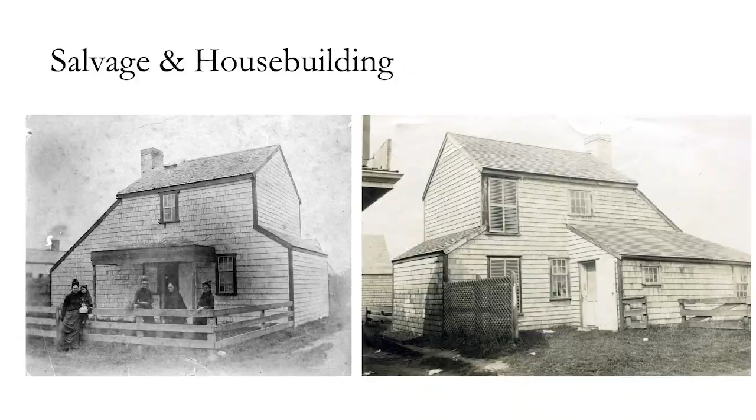You go out to Sconset - that's the next picture. You see Sans Souci, a house here. Has anybody seen this house out in Sconset on Shell Street, Center Street? I give the tour, but it's built out of pieces of shipwreck. Bricks that were from the British ship Queen were scavenged by the people living here to build the chimney.

And in addition to salvaging these structures, we've been moving them for about 270-plus years, something that if you go to any HDC meeting, you're going to hear me say on a weekly basis.

Anecdotally, I was provided some family history as a Nantucket native of multiple generations who married another Nantucket native. My grandmother-in-law told me that in 1959, part of their house was actually deconstructed completely, and part of it was used to build a new structure on West York Street, as well as some of the verge board from that Victorian structure being put on another structure on North Water Street. Again, this is part of what we've been doing with revitalizing our structures.

I went through the paper and looked at a couple examples of historic salvage. One was in 1947, when Albert Egan Sr. removed the Hiltz property adjacent to the Sconset Inn. The structure was taken down with care in order to salvage as much of the material as possible for the new cottages - the Moby Dick Inn cottages out by the summer house cottages.

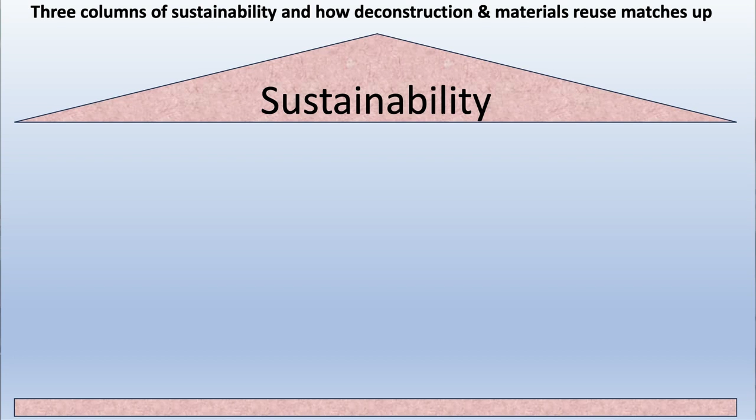I'm going to look at how we can do that in relation to building materials, deconstruction, and materials reuse, because this all feeds into maintaining our historic fabric. I know I'm borrowing from some previous themes and future themes discussed here today. But the historic fabric, as Holly explained to me, is what the character of our homes are. We're talking about our homes as far as this effort is concerned, and some other ancillary type buildings and municipal buildings as well, potentially, which would be wonderful.

We already talked about the environmental part of sustainability. Here's how you can include it: by looking at carbon savings, keeping embodied carbon within the property and within materials, reducing transportation emissions so we don't have to bring so many things here or move deconstructed or demolished materials off island. Reduce landfill emissions, because once we put things into landfill, things decompose, carbon gets broken down, methane is released, and that is net negative and bad for our environment and atmosphere, triggering more of the climate problems we're already starting to see.

We reduce our disposal volume, which is clearly a good thing as we look forward to where we have to close our town dump, and how construction and demolition building works and operates. And it reduces overall demolition waste.

The next leg is the equity leg. I'm going to hit the same theme twice between this and the next one, but it is effectively cheaper materials for people to use to build homes. When we already have an overly stretched housing market to some degree, if you can get lucky and get yourself a plot of land and try to build something on it with cheaper materials, all the better for the person building the home.

This is where I bring back in retaining the historic fabric. Mary already said it - it's materials that might have come from one building and be in another, but it stays on island and keeps our character in place.

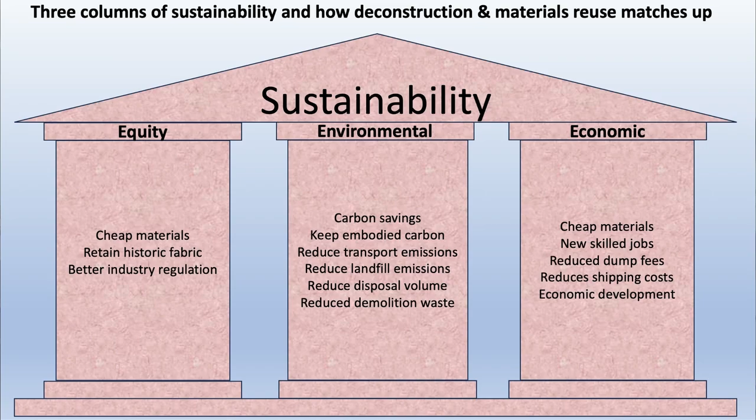Before we get onto that, I'm going to look at different options of how this might all work. The main one, and the best option in some respects, and one of my favorites, is to move the whole house - move it to a different site, and you get to maximize your carbon savings and move along. This is the best option in some ways.

There's already a town bylaw that covers this - the demolition delay bylaw. You get 60 days to try and find somebody to take the house and move it off-site before a building is demolished. It would be lovely to see that term of time increased.

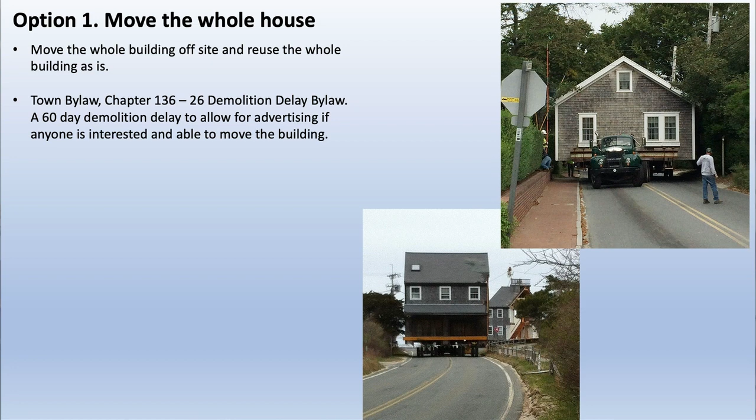There's an existing program that Nantucket Housing Trust and Annie Kutzba and her organization run, where they have people waiting in the wings to take these homes if there's a suitable matchup between a person who's ready to take a home, has a site they can move it to, and can get a company in place to move that building. This is all done through HDC approvals, and I encourage people to sign up for it if they can.

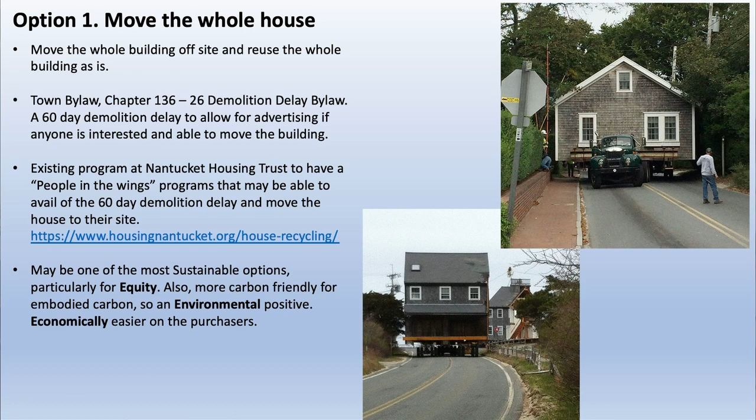I'm looking into it, but we also have to look at how this fits in with one of our existing activities of moving homes. As Holly says, we've been doing it for centuries here in Nantucket, and it hits all of the sustainability goals. It fulfills equity because it makes a cheaper building available for somebody to reuse. It obviously has the carbon savings, making it an environmentally friendly way of doing it, and because it's cheaper.

Sound died. Oh, we're back. Thank you. He's right there. Thank you very kindly.

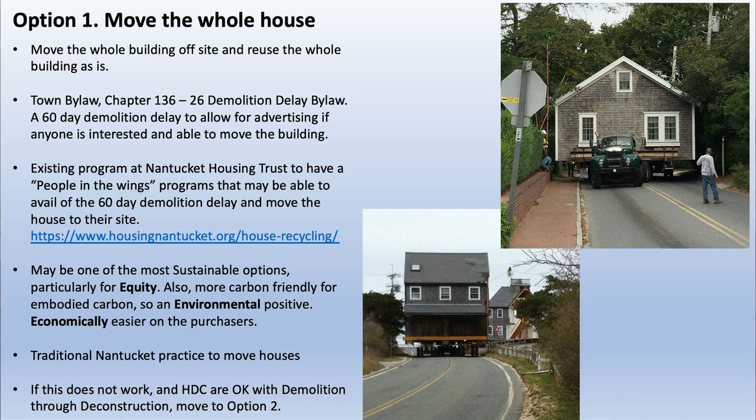So fulfilling the economic part of it. And as has been said many times before, and will be said many times here again today, this is a Nantucket tradition. It is part of our local ethos. And if it doesn't work, the HDC are okay with it, then sadly we have to go down the demolition route, which, as we've already heard from Mary, we have to know when to say thank you and goodbye to the house, to quote Marie Kondo.

So when we look at deconstruction, we have two key options as I see it at the moment. This is looking at it in a forward-looking way. How could we do this, and trying to see what policies we could put in place, what infrastructure we could put in place.

The way I see this working is that we could have a town facility, and this has been widely discussed and people are quite interested in this idea. Or we could do it separately like other communities and have a bylaw in place. So what I'd like to do now is go through how we might have a town facility, how that might function, how it could work, and then how a bylaw might work by comparison. They're two very different tracks.

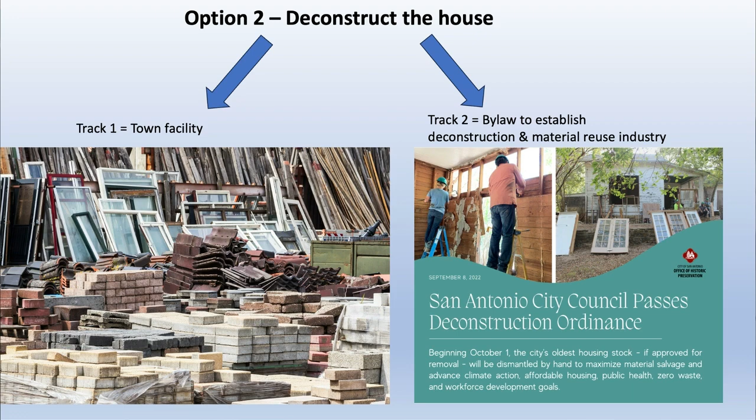So to explore the town facility first, we're going to have to find a place for deconstruction materials to go. There was a great report done recently, I think about a year ago, maybe a year and a half ago. I'm going to misquote it now, please somebody correct me, EBC. And they developed this wonderful plan for possible locations where such a building might go.

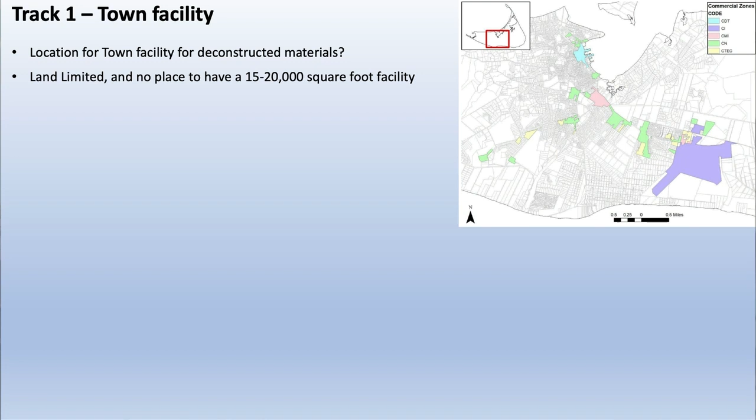But when we look at it, the building would probably, and in the report they have similar numbers, be something in the region of about 15 to 20,000 square feet. It'd be a big facility. But we have to understand what that means, just try and visualize it. I went around and had a look at a few things, cruised the town website and looked for similar sized buildings so people get an actual idea of what 15 to 20,000 square feet would be.

When you go to the dump on a Saturday or Sunday morning and go up to the recycling facility, and there's all those doors where you put down your plastic, tin and cardboard, that whole building itself goes back quite a distance and is maybe 35, 40 yards from east to west. That by itself is a 20,000 square foot building, big enough to take large-scale machinery in and out. But the footprint is 20,000 square feet.

The Dreamland, right here in the downtown area, just the footprint on the ground, not upstairs or anything, that's about a 10,000 square foot building. Right here, our Whaling Museum, the footprint of this building is about 15,000 square feet. So we'd need something at least the size of this building potentially.

But if you want to get seriously ambitious and have such a massive centre that we can take the extreme volume of property we have on this island over time, just look at Stop and Shop, the big one Mid-Island, about 38,000 square feet. So maybe somewhere between the size of the Dreamland and Stop and Shop is what we'd need for a facility to store and process deconstructed materials.

But it's not just that. You also have to have the access roads, the parking, and a loading and unloading area. You have to bring all of those into mind. You also have to look at the materials you're dealing with. We're going to have windows with lead paint on them and door frames and that kind of thing.

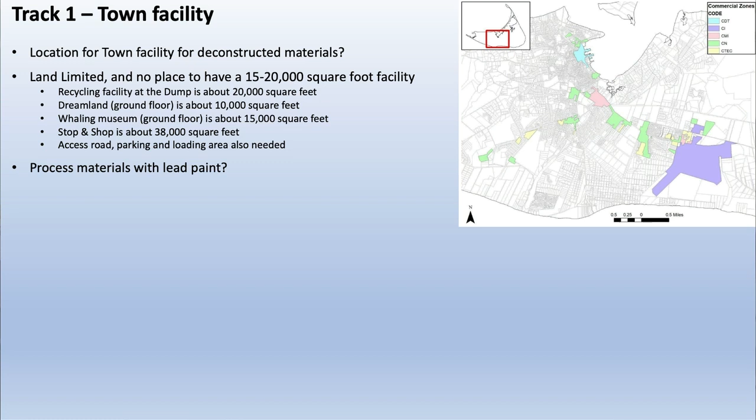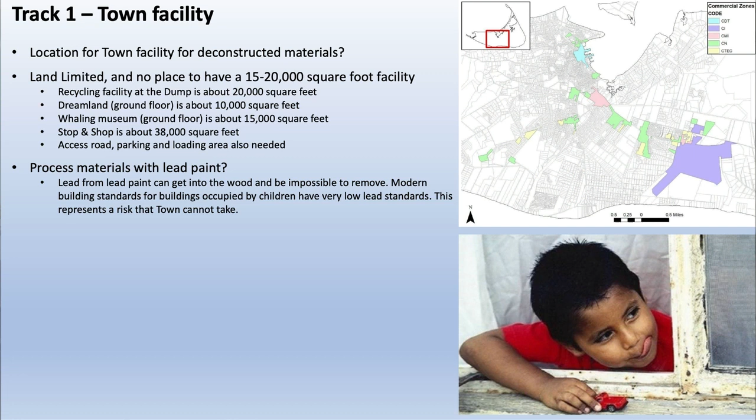And don't forget, kids think lead paint tastes sweet. It's a known hazard that you just have to be careful of. So we have to remove those hazards from any materials we want to reuse. And then there's other materials like asbestos that we have to look at, how do we deal with those in a safe and effective way so people don't end up with mesothelioma.

So then the next question is, who would undertake the deconstruction? Would it be town staff, contractors and builders, or something else? If it were contractors and builders to help get an industry going, one idea is to have tax incentives. I'll talk about more of that in a second.

And who will staff the facility? Would it be town employees? Would it be private contractors, or how would that work?

And what would the annual running costs be? Do you have to sell the items in order to fund and recoup the money that goes into it? What would their salaries be, and how would you fund that through sales? Would they be town staff on pension funds, or would they be private employees? There's a lot of ifs, ands, and buts, and some unknowns, but just stuff to start thinking about.

If we did have such a town facility, how would it operate, and who would be best to run it? And then some materials won't go right away, and they might end up ultimately not being of use and never being taken by anyone. Then the best point would be to take it to the construction demolition building at the dump, so you still have to dump it anyway. You're not going to be able to reuse everything that's brought to such a facility.

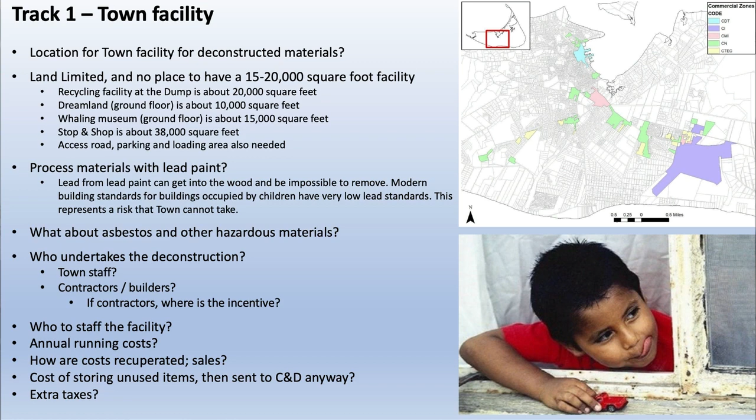And would extra taxes have to fund it? There's a big question in that one alone.

Then there's the concept too, when I was chatting about bylaws, and this is something that's been done in other jurisdictions and municipalities, not necessarily in Massachusetts, but we've got examples from Texas that we've been looking at closely. This would have to involve the creation and writing of a new bylaw for the town, and that alone takes time — it could take years to get right.

It would probably also have to have a set of guidelines in order to understand what materials you reuse, how they're reused, how they're processed, how they're handled, and what their value might be.

But the best thing I could think is, if it was a bylaw, to get industry to set this up, we offer a set of tax incentives in order to allow, say, construction companies or newly developed deconstruction companies to come in, have a tax break for a significant amount of time so they can get their companies set up and understand where things are going.

This is how the guidelines might work. This is kind of where I'm looking at next for the guidelines.

And the biggest thing we'll have to understand is the market will determine the material demand, and the guidelines will have to accommodate them. It doesn't matter if it's free or for sale or at a very low cost — the market will still say what comes out of these kinds of facilities, whether it's town or from building groups. The primary thing that I think would be easiest to move through would be copper and other similar recyclables.

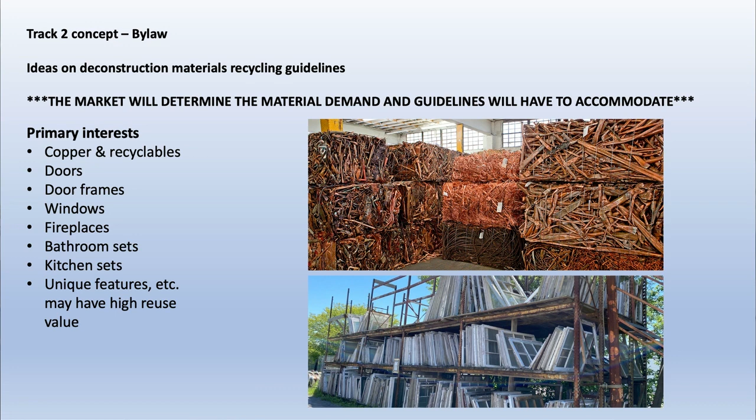Pressure-treated lumber could also be stored in a separate area or reused in different ways. Flooring materials, particularly hardwood flooring and laminate flooring, can be taken up relatively easily sometimes.

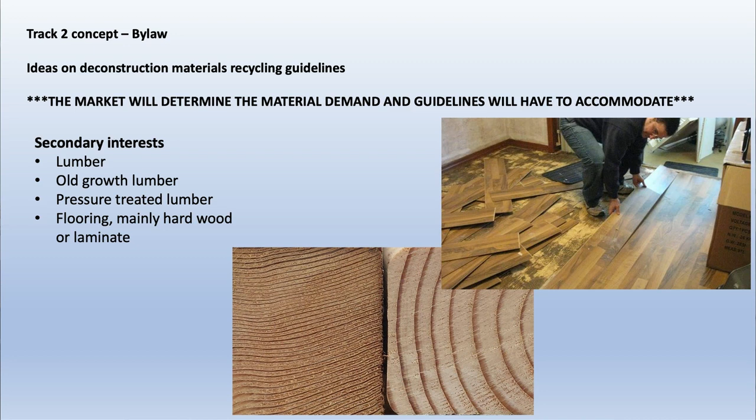But then there are difficult materials that when you're trying to deconstruct a house and take stuff out, you're not going to be able to take out easily without a lot of specialized ability or really well-trained people. I have never successfully removed drywall or tiles without breaking all of them, sad to say.

Roofing materials, by the very nature that you've already put a nail through it once, it's hard to imagine that being reused. And insulation — fiberglass insulation for the sake of argument, there are other types too — they're hard to recover since they've already had a life in a building.

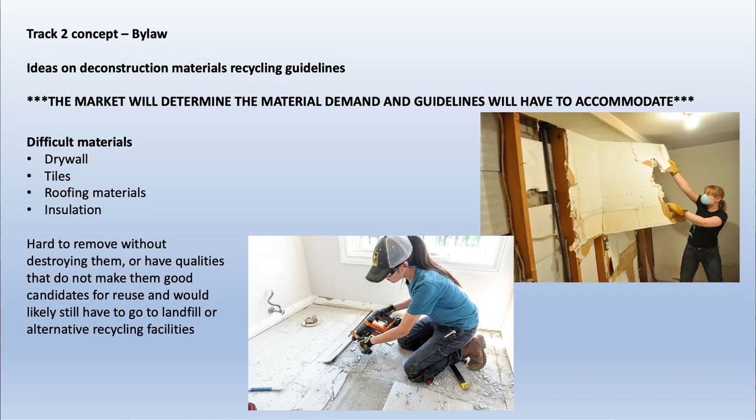They might not necessarily have the same properties as the day they went in. So you have to consider, well, what do we take, what can't we take?

There are also other materials that are difficult, particularly white goods. This is something of a problem for the town. It'd be simpler for a private organization or building groups to be able to undertake this.

The biggest problem with a lot of the white goods is that, say, a refrigerator might have chemicals in it, CFCs and other refrigerants, which if not properly handled can actually contribute to our greenhouse gas situation. We also don't know if the machine would have a warranty.

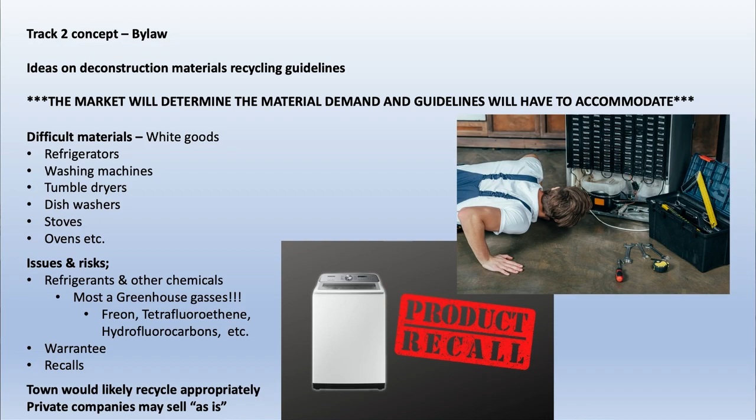We would have to give it away in as-is condition, and if heaven forbid there was ever an issue with it, there would be potential for recourse for somebody to sue the town for a faulty machine. That would bring in unnecessary legal challenges. There might also be recalls on machines. We need to understand this. It's an unnecessary risk for the town to take.

So, all right, we've been through all this now. We understand that there's potential for a facility and a bylaw to have private industry effectively create these on their own sites and on their own terms, and understand what materials are useful to them. But the conclusion is, there is no real result. We're still investigating possibilities. This is quite early in the discussion.

I'd like to advance this, and I'd like to seek feedback from everyone, please. If you have anything, please email me, talk to me, find me. My office is at 131 Pleasant Street in the old fire station. You go to Stop and Shop, you come to me before or after. We can all have a nice chat about it and think, well, what do people want to see?

How does this want to function? Is a bylaw better? Do you prefer to see a big facility? Who will run it? How will we work it? And with all of that, I would actually like to ask everyone to act sustainably, and say thank you, and see if there's any questions before. Do we have time for questions? Thank you kindly, everyone.

Any questions? Or is everyone just eager for a break? Yes, sir.

So you have to contend with some energy codes when we're moving houses these days. For example, if you wanted to move a house and renovate it more than 50%, you're not going to be able to reuse old windows and stuff like that. Have you started to consider how to work around the HERS codes for energy?

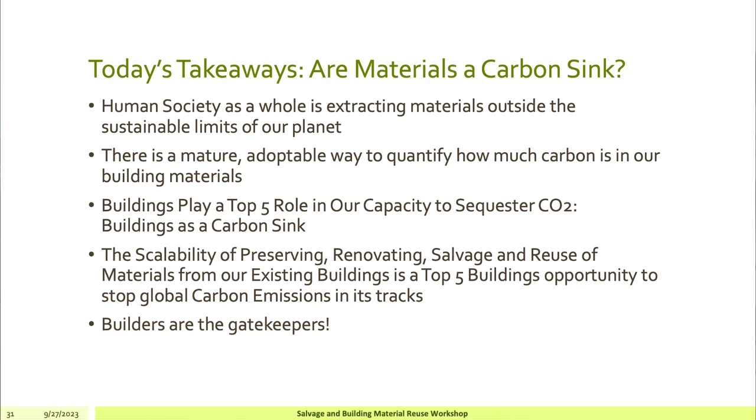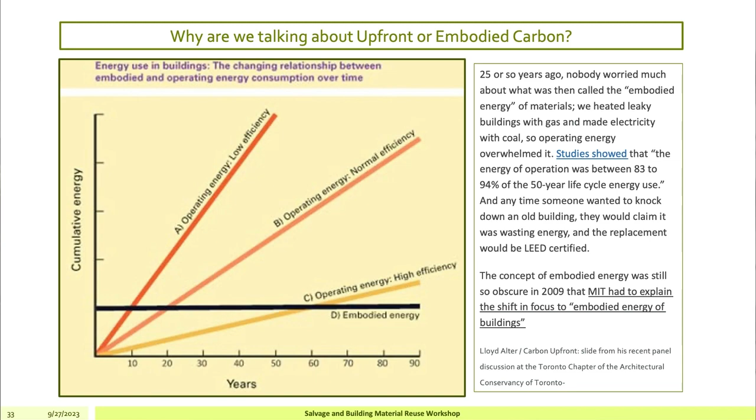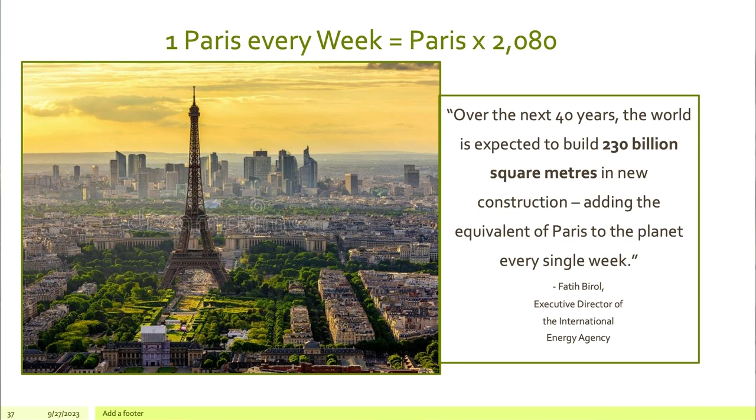This has been confirmed: we're expecting to build one Paris every week for the next 40 years. That's 2,080 Parises. So we're talking about a lot, and that's globally, not just here on Nantucket. We're talking about a lot more than recycling and reducing our personal footprints. It's going to take a concerted effort globally — governments, businesses, and all of us. I'd argue the failure to tackle the climate crisis is far more expensive. Already this year, there's been 137 weather incidents of $1 billion or more just in the States. So to build 2,080 Parises, where's the stuff going to come from?

In 2017, the Circularity Gap Report was first issued. It highlights the urgent need to transition to a circular economy. We aim to empower key decision makers in both government and business to coordinate action to accelerate this transition. I started paying attention to this a couple of years ago. We're actually doing worse — we went from 8.6% reuse to 7.2% in this last report. So it's kind of on the downward swing, and we have to improve there. But this is a really interesting and vital report.

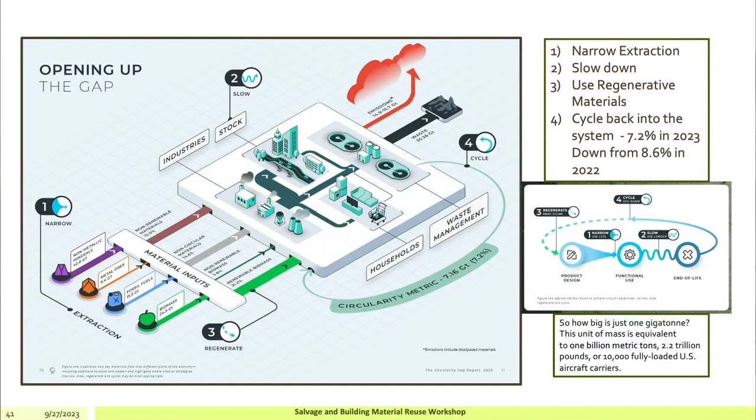And then what role do buildings play? Be as energy efficient as possible. This is from the report — these are their four criteria for improving buildings as a participant in this process: be as energy efficient as possible, make the most of what already exists, prioritize circular materials and approaches, and reuse waste. Waste ties back to cradle, because if we're reusing it, it's no longer waste.

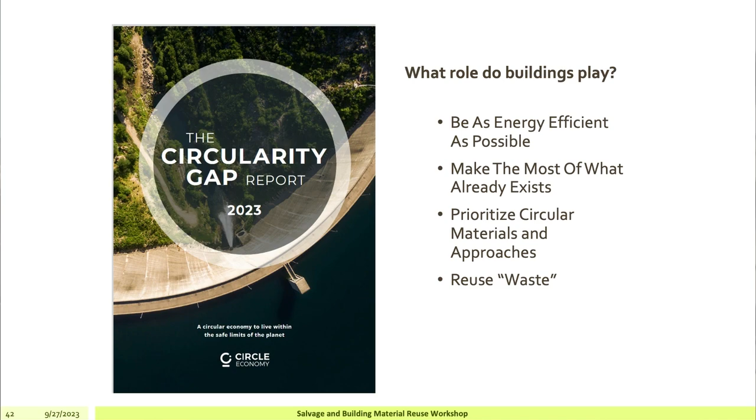Okay, so what can we do in our backyard? My team has been working on whole life cycle analysis of the carbon intensity of buildings. As an energy consultant and HERS rater, we already understand and map operational costs like heating, cooling, and hot water. Our team has embraced the idea of understanding what the materials costs are too.

This is from the New Buildings Institute. What's the whole life cycle of a building? From module A1 through D, A1 being product extraction, transport to the factory, and manufacturing of products. This is what my team's focused on, and what we're talking about today. B6 and B7 is what HERS raters already track. This is the entire life cycle, or whole life cycle of a building, and that's what we're trying to analyze.

So how do we understand what the value of the materials we're putting into buildings costs? It's called an environmental product declaration. I come from a family of chefs, so I really like the idea that it's actually a nutritional value of the materials in your house.

This actually comes from Owens Corning, the Pink Panther insulation. This is effusive across materials globally. Everyone's starting to report it. It's not mandated yet, but it's likely that, just because everyone else is doing it, every manufacturer globally is soon to have a nutrition label for their building. The fact that this comes from Owens Corning is kind of a testament to that.

Concrete's extremely intensive - I think everyone here understands that. It's the number one emitter globally. There are over 80,000 concrete EPDs in existence in North America right now. So the writing's on the wall.

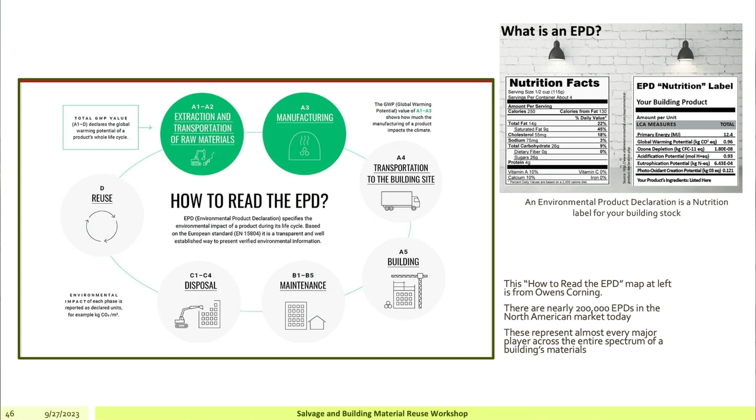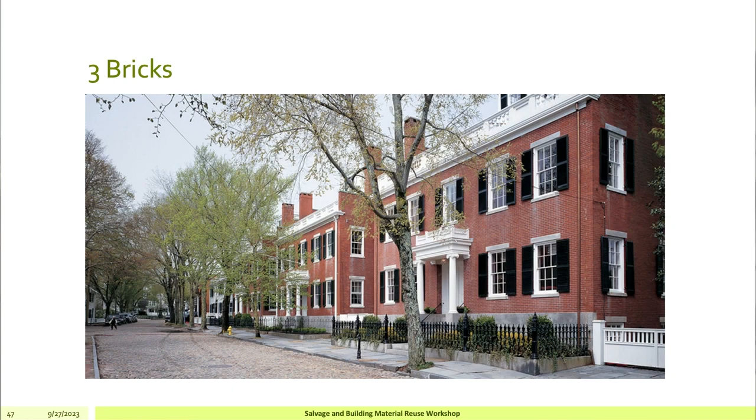All right, everyone knows these buildings. Probably most of us have been through them or walked by them, even as recently as today. So imagine for a moment building these buildings today from brick, not almost 200 years ago. I'm going to go forward and then back.

Here's the nutritional value of a brick, and a cubic yard or cubic meter, which is essentially like a pallet. We see pallets of bricks, pallets of stone. A cubic meter of brick is 500 kilograms of CO2 equivalent, which may not resonate with you yet, but it will in a minute.

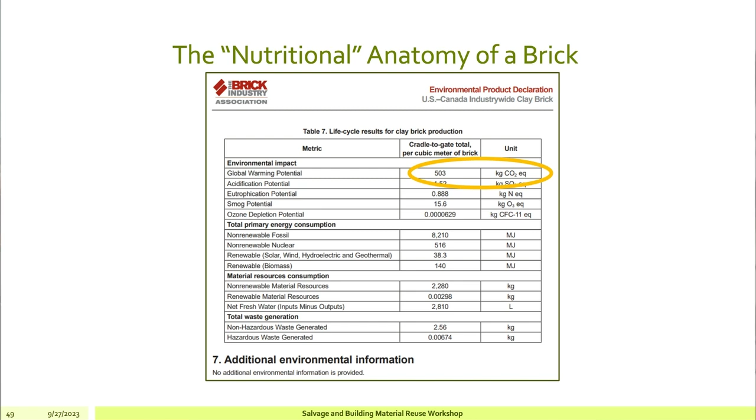Globally, bricks are the most carbon-intensive process, more than anything else. 2.7% of global emissions comes from brick manufacturing - that's about 1 billion tons. That's just from emissions and the production process. Going back to the whole life cycle analysis, it's A1 to A3, just manufacturing those bricks, not putting them in the building.

But here's good news: if the bricks are already in the building, they don't cost anything. So the least carbon intensive building is one that's already built. And so that's what we're talking about.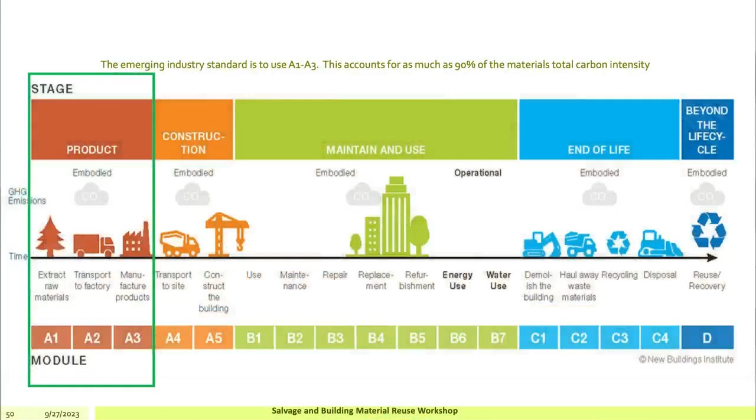Here we go, so we talked about that already, thanks. So what does a metric ton of carbon dioxide look like? It's loosely the size of a Cape Cod home. A lot.

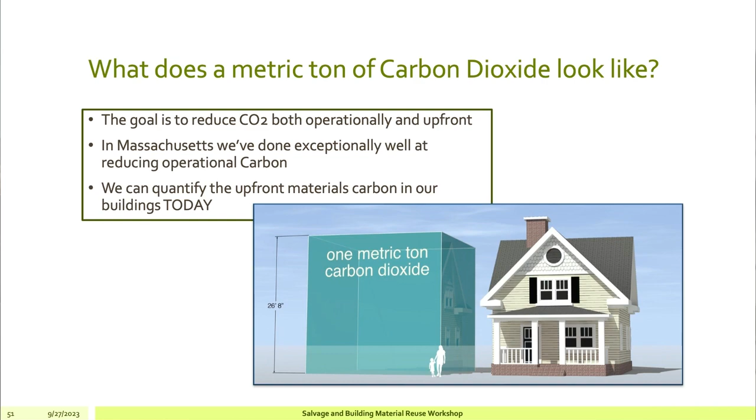So 1 cubic meter of bricks is half the size in carbon dioxide.

I'm the embodied carbon chair of the Northeast HERS Alliance, and we've collaborated with BEAM, Builders for Climate Action, and built the BEAM tool, which is tracking software to track environmental product declarations across the built environment. It was uniquely built for builders. There's a whole host of softwares for large commercial buildings and institutions, but BEAM and Chris Magwood really tackled residential construction head on and made it really digestible for builders and HERS raters, energy consultants, to really tackle this.

It looks like this. It's really interesting and very simple to use, like most spreadsheets we use today. For example, this is suggesting timber posts and beams, heavy timber framing average. It's taking kind of an aggregate because they didn't have a specific report for this one. 2.9 cubic meters is 575 kilograms of CO2e. I only show it because it's instructive - that's how simple the tool is.

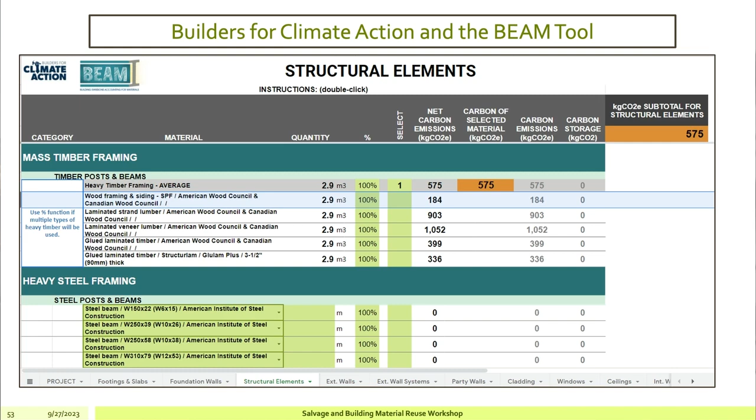As HERS raters, we already map an entire building, and we understand pretty cleanly all the component parts of the exterior shell. So our idea was, okay, let's take those inputs and see if we can streamline it so we can do it at a rapid pace and get real reporting. Now I can do, and our team can do, a whole building that we've already HERS rated in about 20 minutes.

So here was my trial run. This is my coworker Ron Lynch's house—he said I could use his name. This is a structural insulated panel house, a SIP house. Ron designed it himself, it's super efficient. It's net zero operationally because he's got solar panels on it. It's a HERS minus 27, if that means anything to anybody in the room.

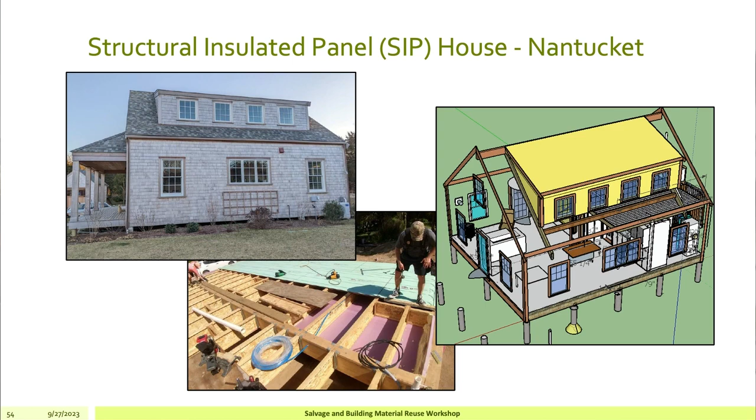It's an amazing house, but then I gave him the bad news that it was pretty carbon intensive because he used SIPs. I love Ron, it's a great house—I'm not disparaging him, but we used it as an example.

So what it shows is this SIP roof, 18 tons of CO2 equivalent. So it's beautiful, operationally negative—he's sending energy back to the grid—but to build the building, using an awful lot of CO2 equivalent.

Nice thing about the BEAM tool is we can do trade-offs, so we can understand in real time what switching materials might do, and it gives us the top 10 highest impact outputs. So foam is really expensive environmentally, SIP panels are expensive. Here's concrete—concrete seems low, right? But that's because Ron's house was built on piers, so we used a fraction of what the concrete would typically be for an 8-foot basement.

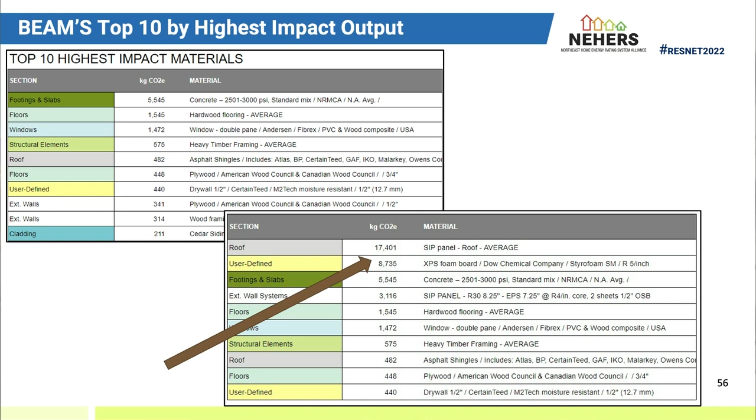We ran a number of scenarios showing all these different inputs, but I won't show them today. One was really important though that I wanted to show, because we're talking about biogenic materials and materials that can rapidly regrow.

One of the interesting emerging technologies is straw. There's a number of companies up in Maine that are growing their own straw on farms, producing modular panelized homes and selling them. And there's a backlog—they're building them as fast as they can, selling them like hotcakes.

So we've actually—my wife's here—I think she knows that we're going to put one in our backyard.

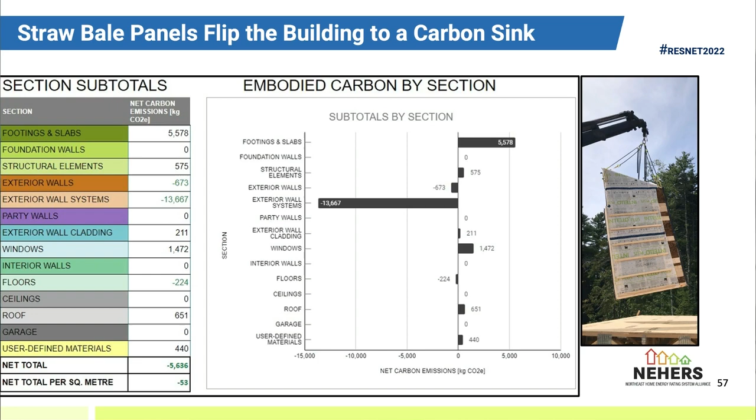So by using straw and making the same structure, we were actually making a carbon sink. The total emissions from this project because of the straw as a panel is 5.6 tons sunk embodied carbon. So it's a pretty remarkable flip-flop to go from almost 40 tons.

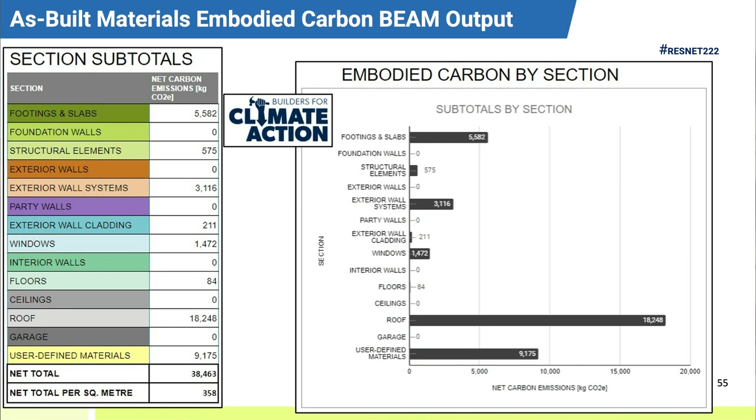And then to bring it back to our bricks, the US standard for brick intensity is in the BEAM tool. So I reclad Ron's cedar shake sidewalled house with bricks, and it added another almost 18 tons of CO2 to his structure. So materials really matter.

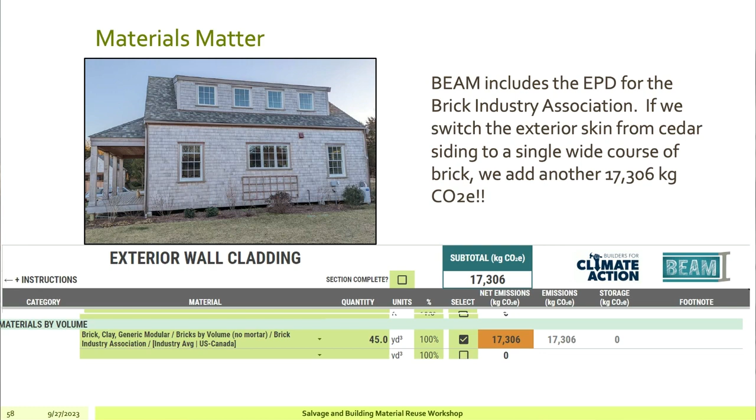And just for perspective, that's that cape—there's Ron's house built with SIPs. Here's Ron's house by replacing the SIPs and the foam in the SIPs with cellulose insulation, which is recycled newspaper, which is what I installed for some time out here. And here's Ron's house as a straw house.

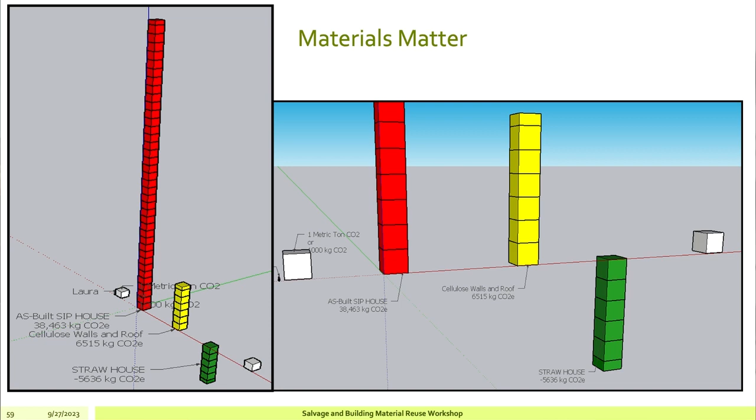So hopefully I've identified there's a mature way that we can actually track embodied carbon today, and I'd be happy to collaborate with Vince on how we can start to analyze those metrics to revalue existing buildings and understand how they can play a really vital role.

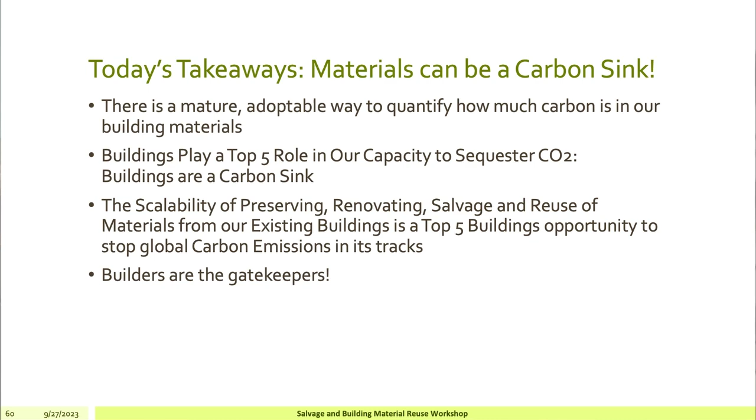And to Jeff's point about HERS ratings and energy dynamics, if we can take the whole footprint of a building and eliminate—say for a brick, it may not be as energy efficient, but if we can quantify the materials that went into that building and give that a score, we've fundamentally changed the vitalness of that building product. So I'm hoping that happens sooner than later.

Our first technical committee meeting is Monday, where we're evolving the national standard. My guess is 18 months from now it'll be a usable product, but then we need to train the workforce to do it. But we can do it, and we can do it today. I am on a number of projects, so I'd be happy to collaborate with anybody in this room.

So how do we move forward? I don't know—that's why we're here, trying to figure it out. How do we move forward on Nantucket? How do we solve these fundamental problems and challenges that we've all faced, really for my whole career here?

We've all pulled nails out of boards to reuse them. We've sanded old barn boards to make furniture. There's a lot of value to those things—we need to revalue them and try to monetize it.

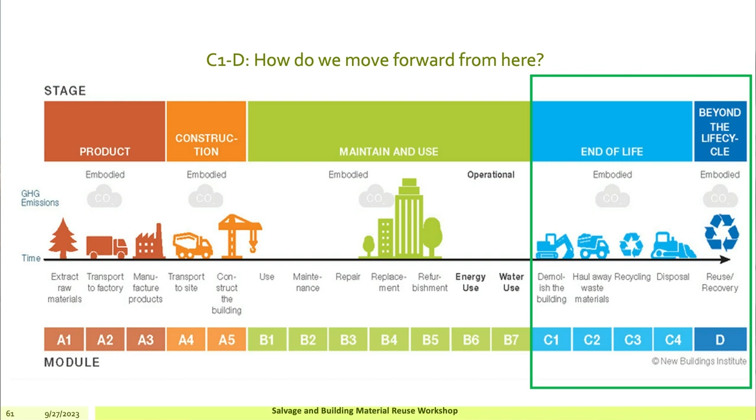Because at the end of the day, this is about builders and making builders' jobs more reasonable, more equitable, and we're ultimately trying to make them prosperous while doing the right thing. And that's what Stephen's company—we call it fiscal environmentalism. It doesn't cost more to do the right thing. So we want to prove it today so that tomorrow we can roll out solutions environmentally.

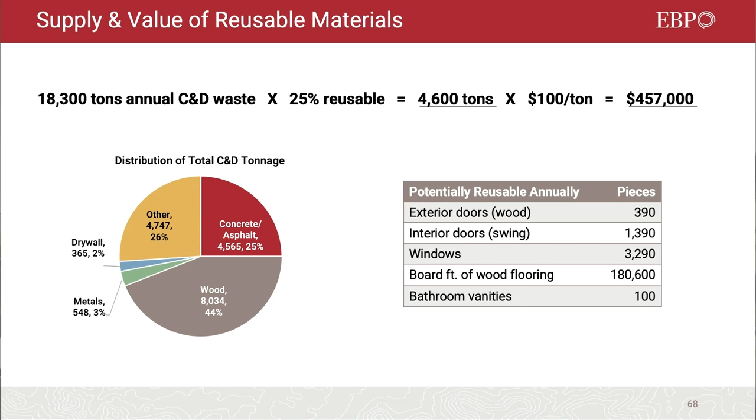So we conducted 9 interviews with residents to better understand attitudes and opinions on deconstruction and reuse of salvaged materials on island. In general, people we interviewed were very supportive of more deconstruction on Nantucket, but had various concerns. We heard repeatedly that deconstruction is more expensive than demolition, and as a result, it's often less expensive to purchase new materials for projects. Insurers and building codes require that certain materials be under warranty when used in new construction or renovations. And then there's the time sensitivity of clients wanting to complete projects quickly.

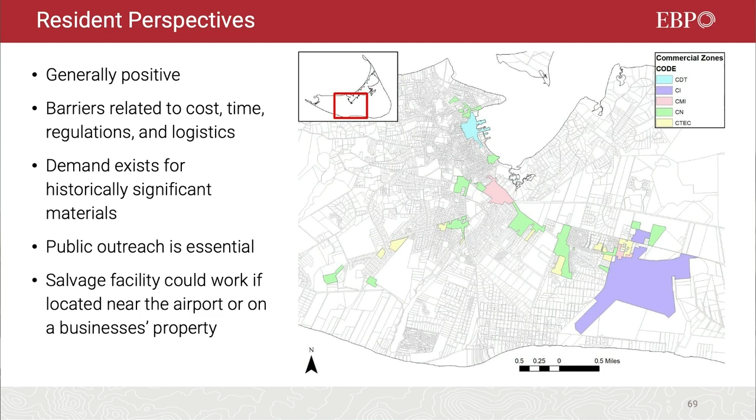So the main barriers to a salvage facility on island are high property costs, and that workers might require subsidization to pay them living wages, given the high housing costs. We also looked into labor costs, accessing a data set for the Cape Cod, Martha's Vineyard, and Nantucket regions, to get a sense of expected labor costs for salvage facility workers.

The closest equivalent to a salvage building materials facility worker was the transportation and warehousing industry, where the median hourly wage is about $16 per hour and a median salary of $33,000 per year. According to MIT's living wage calculator, only an experienced warehouse laborer would earn a living wage on Nantucket, which is about $20 per hour for a single adult with no children, and certainly higher for families. This suggests that wage subsidization or a housing allowance may be required to create living wage jobs at a salvage facility.

Workforce development and training is also important for deconstruction. A Portland, Oregon study found that the amount of reusable building materials obtained from a deconstruction effort was highly correlated with the contractor performing the work, much more so than the age or size of the building being dismantled, due to greater deconstruction skill and experience.

Since reducing carbon emissions is so vital, as Andy was talking about, and Vince and everybody, we estimated the avoided carbon emissions associated with reusable C&D materials that are currently put into the Nantucket waste stream, and the embodied energy of new materials required to replace those discarded materials.

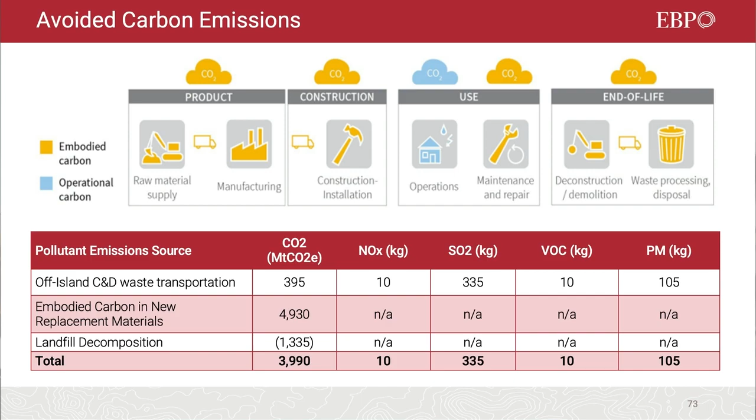Waste Options has materials that end up at Sunny Farm Landfill in Fostoria, Ohio, which is 908 miles away. Truck, ferry, truck to a 775 train mile trip. So you get a sense of why it's important to be reducing these materials. And there's an additional impact, the embodied carbon, in the creation of new materials to replace those discarded materials.

Another big driver here is the Massachusetts 2030 Solid Waste Master Plan, which establishes goals to reduce disposal statewide by 30% by 2030 and a 90% reduction in disposal by 2050. We have some big goals on the horizon, and I think we're on the right path here.

In the existing ordinance research and new ordinance development phase of our study, our team explored existing deconstruction and reuse ordinances around the country to see what elements might be applicable to the Nantucket community. Some ordinances, such as those in California, were driven by the need to meet the standards of state-level environmental legislation.

Others were established in recognition of the significant contribution construction and demolition waste makes to landfills and to reduce municipal waste costs. Notably in Portland, Oregon, the ordinance was driven in large part by citizen dissatisfaction with the large amount of dust and noise being generated with the many demolition projects occurring in neighborhoods around the city.

So there's a wide variety of ordinance types in use around the United States: ordinances with deconstruction and reuse requirements, some prohibit use of heavy machinery and so forth; ordinances with diversion requirements, per square foot minimums, weight per square foot disposal maximums; ordinances that use a scorecard requiring demolition permit applicants to earn a total number of points; and then applicability based on type of activity, type of structure, residential or commercial, building age, size, or value.

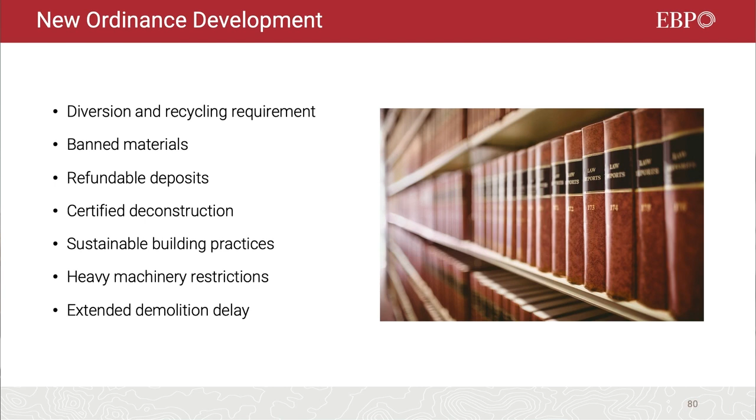Of parcels containing a built structure, approximately 1,200 structures, or 13%, were built prior to 1900, shown in blue. An additional 2,200 structures, or 23%, were built between 1900 and 1975, shown in yellow. And over 6,100 structures, 64%, have been built after 1975, shown in red.

Interestingly, the National Park Service considers 1975 to be the end of the period of significance for historical buildings that contribute to Nantucket's National Historic Landmark. About 3,500 parcels, or 36%, contain a structure built before 1975, many of which are located right here in town.

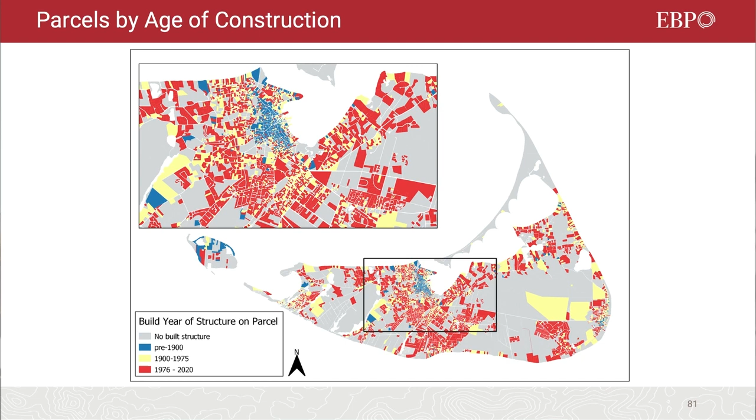So the phase 2 study results indicate that there are multiple policy approaches to encourage or require deconstruction and building material reuse that have been employed by communities around the US to support sustainability objectives. And beyond the clear environmental benefits, the other drivers to implementing deconstruction and reuse policy measures include historic preservation, depletion of natural resources, declining landfill capacity, cost savings, and the affordable housing crisis.

So after identifying and analyzing the key strategies and leverage points, the primary recommendations of our study included convening stakeholders to build support and design and implement an ordinance, or start talking about it. I think that's partly the reason we're here today. Explore comprehensive deconstruction ordinance for approval at town meeting.

Extend demolition delay period to 6 to 12 plus months. Revise the demolition delay process. Explore additional incentives for deconstruction to make it more cost effective. Devote resources to training workers. Establish an on-island materials storage facility. Partner with off-island materials reuse operations, potentially as an interim approach.

And pursue deconstruction pilot concepts with Habitat Cape Cod, who are interested in working out some cooperative arrangements. Use deconstruction ordinance fees and building material sales to support affordable housing, and create a public awareness campaign. And finally, make the deconstruction policy process and support mechanisms straightforward and easy to understand and navigate. As one of the interviewed stakeholders said, people will do the right thing if it's not too difficult. You have to make it easy for them.

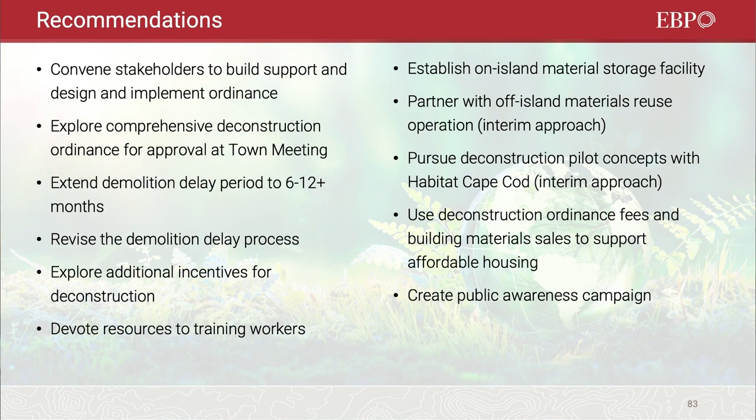So there are other innovative deconstruction and reuse models out there, including the Deconstruction and Reuse Network in Long Beach, California. It's a good example of a non-warehouse deconstruction and reuse program and combines a deconstruction network with a reuse network. The reuse people are headquartered in Oakland, California, with facilities in 8 states throughout the US.

They operate retail warehouses and offer a range of deconstruction and materials reuse services, including deconstruction contracting. They also operate the Reuse Institute, also located in Oakland, which provides deconstruction training and certification.

And finally, deconstruction contractor Goodwood illustrates Portland, Oregon's success. Over the past 4 years, the city has deconstructed more than 420 single-family and duplex homes that were registered as historic places or built before 1940. Goodwood has taken apart 160 of them. And overall, there are 19 contractors licensed to deconstruct in the city of Portland, thanks in part to a city-sponsored training program. And reports are that the cost of deconstruction has actually gone down since the rule went into effect.

So this is all very exciting. There's so much happening around the country in the deconstruction and reuse space. And hopefully this has given you a sense of some of the options of what's possible for us here in Nantucket.

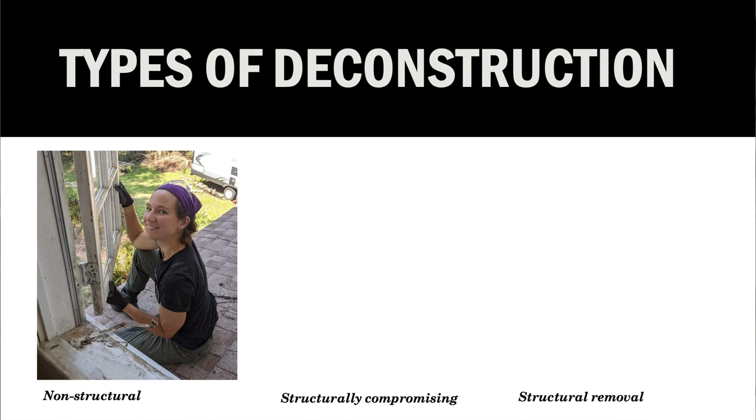People will be familiar with deconstruction in usually some aspect. I'd like to clarify that even in this niche of the industry, there's a lot of variety. Most people are super familiar with what I call non-structural, but what you'll probably recognize as architectural salvage—these are the cute pieces: your mantles, your doors, your corbels and windows, all the pieces that have high reuse potential. People are very familiar with this idea of building material reuse. We also see in this industry structurally compromising decon—decon being short for deconstruction. What is this?

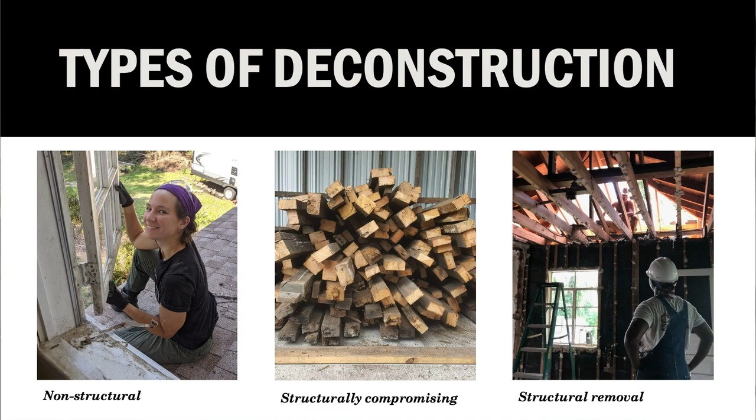So what my nonprofit offers is full service structural removal. At the end of the day, you're going to see probably the same thing that you'd see at the end of a deconstruction job, which is a clean dirt site. However, as you'll see in the course of my presentation, these two processes couldn't be more different.

Full service in the sense that we provide removal of the structure, absolutely, all the way from the ridge beam down to your piers. We also research and document your building. We're also going to help you out with your permitting. We're going to do whatever we can. Anybody who's interested in this service, we're going to do what we can to help you access it.

That's because this is new, or as we'll see, it's new again. And sometimes people need a little help to do the right thing, right? If we just make it easy, they'll do the right thing.

We've talked a lot about how deconstruction is not new here on Nantucket, and that's true all over the country. So deconstruction and reuse, it doesn't stop with taking the building apart, but it really is this whole cycle, taking them apart and then reusing those materials.

It is a practice as old as building itself. Demolition, as we'll see, is a pretty newfangled idea, but for the depth and breadth of human history, this is what we've done with our built environment. It would never have made any sense to take perfectly good building materials and put them in the trash and then go out into the wilderness and try to harvest brand new materials for our buildings.

For time out of mind, this has been a traditional practice, and we most certainly approach it as a traditional craft. I'm happy to say that we're gaining some traction in the preservation community, being recognized as a heritage trade, and one of the aspects of training in traditional craft trades across the country. I'll talk about that a little bit more.

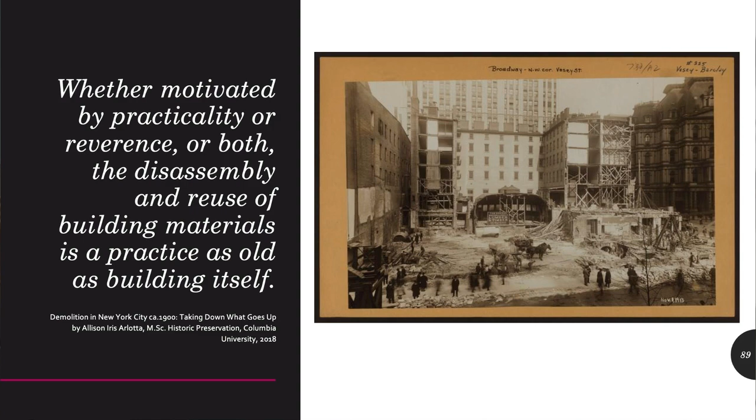This is a great article I recommend if you're curious about the history of deconstruction and reuse outside of Nantucket. This is written by my friend Allison Arlotta, and it's about deconstruction around the turn of the century in New York City. There is an incredibly cool time-lapse video on this webpage that shows a skyscraper in New York City being unbuilt brick by brick, something that is so beyond what we think about as possible today, but we've done it before and we can certainly do it again.

I know that this is true because we do a lot of research, but I also know that this is true because I've taken many buildings apart, over 40 buildings in the last few years, and I have never taken apart a building where I didn't find evidence of building material reuse in that structure.

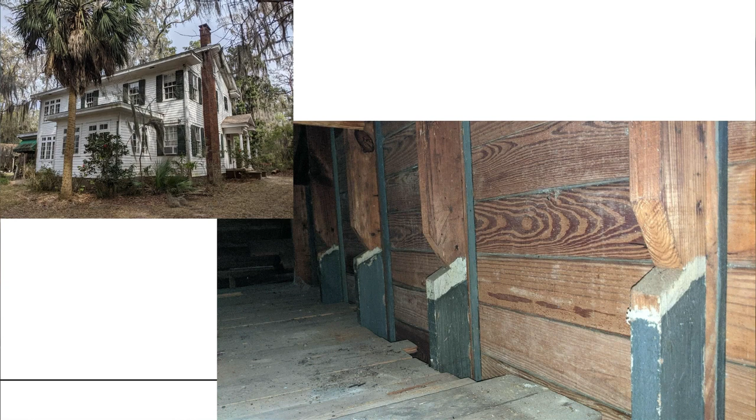We're talking about historic Savannah. It's a wonderful place. It's been a wonderful place since it was founded. Really significant and amazing buildings. There was also a lot of wealth there, so there wasn't necessarily a need for secondhand materials. And yet, even in fine homes, we see building material reuse. Why? Because it was just sensible.

This is a wonderful property out in Vernonburg. Broke my heart to take this building apart. It often breaks my heart to do this work, but it was going to go to the landfill, so you better believe I got in there and saved every stick of it. And here in the roof, you can see used as studs, a bunch of old rafters. These are obviously rafters in the same house. They've got the bird mouth cut out of them.

And then where those little rafter tails stuck out, they got painted more than once, as you can see. Same building, once we've had the finishes stripped off, and you can see even more evidence of building material reuse.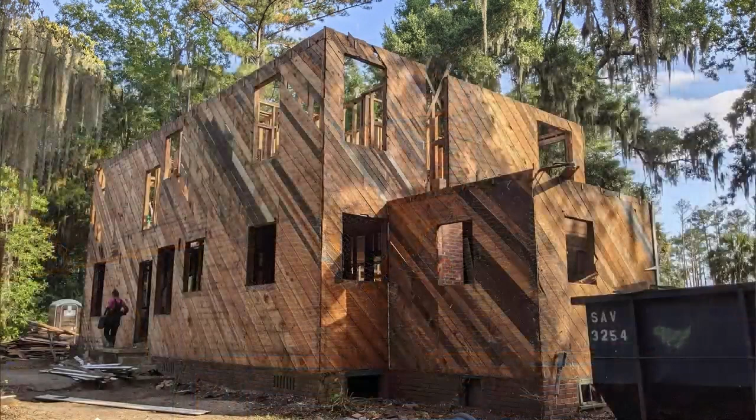Isn't this stunning? It looks like a painting. You can see the different colors of the wood, the different ages of the wood. You can see some of it's been painted, and some have been stained. Some had a rounded edge—probably baseboards. Some had notches taken out where they passed over a window opening. They might have been sheathing in a different building, but now they're sheathing in a different location.

Evidence upon evidence. I could show you a zillion slides of this, but you'll have to come to another presentation of mine for those. All of this to say, not a new idea, and certainly not an outlandish one—something we can do, we have done, and we can continue to do.

So how did we get here? The age of demolition. I said before, demolition's a bit of a newfangled idea. Anybody know how old demolition is? Without polling the class, I'll just give you the answer: it's less than 100 years old. Demolition was invented after World War II. That was 80 years ago, folks. And yet somehow this has become so ubiquitous in our public consciousness that we can't imagine doing anything differently.

But believe it or not, the technology we use to demolish our domestic environment was not invented to do this—it was invented for the war effort. In World War II, many of you will be familiar with the famous Seabees, the engineering corps of the US Navy, largely given credit as one of the most significant factors in Allied victory. The Seabees specifically worked to facilitate the movement of tanks, troops, equipment, and supplies across the European theater. This technology—the bulldozer, the excavator—was invented to clear bombed out cities so we could move through them after an attack, and to clear the natural landscape to facilitate the movement of those products and humans across space.

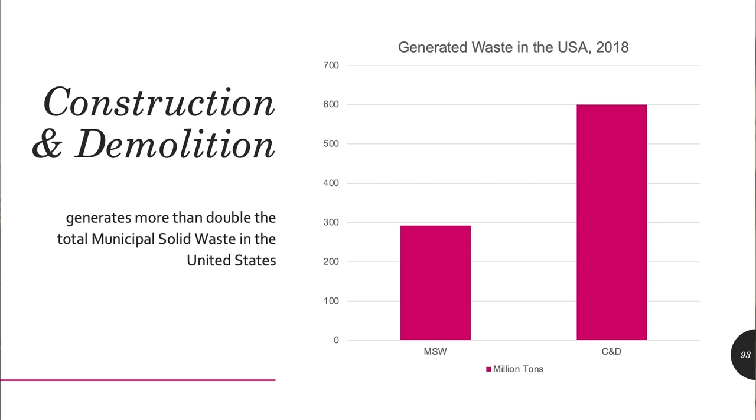And what does that fallout look like? Without belaboring the point made eloquently by so many of my friends here today, I'd just like to point out that construction and demolition generates more than twice the municipal solid waste across the country. That means if you took the garbage generated by every American in a year and put it in a big pile, that pile would be less than half the size of the pile generated by the construction and demolition industry alone. That's an issue.

Roughly speaking, an American generates in their lifetime about the same amount of waste as you'd expect to see in an American house. So if you keep one house out of the landfill, you've offset the lifetime of an entire American. So I like to say, I'm in the clear, everybody on my team is in the clear, and now we've got to work on absolving all of you of your carbon impact, one building at a time.

Globally speaking, reports are suggesting that C&D is responsible for a third of the world's waste. One industry alone, it is our single biggest contributor to waste. Time to work on this, folks.

It is important to me to also talk about the public health aspect. It was mentioned earlier that one of the major drivers of policy in Portland, the first city in our country to have policy around deconstruction, was the demolition dust and the noise. That dust is highly hazardous to our health. There have been countless studies about the negative health impacts of demolition dust.

And in my city, we've dug in on the research on this to try to see who is the most affected. My city being Savannah, Georgia, reminds me a little bit of Nantucket in some ways, but in other ways it's an incredibly different place. And we see that the vast majority of demolitions are occurring to historic buildings, that's 72% for the year here, and that the vast majority of the population around those demolitions are low-income communities and communities of color. So now we know that those public health impacts are being borne by the most vulnerable people in our communities. And this should activate you immediately. It certainly activates me.

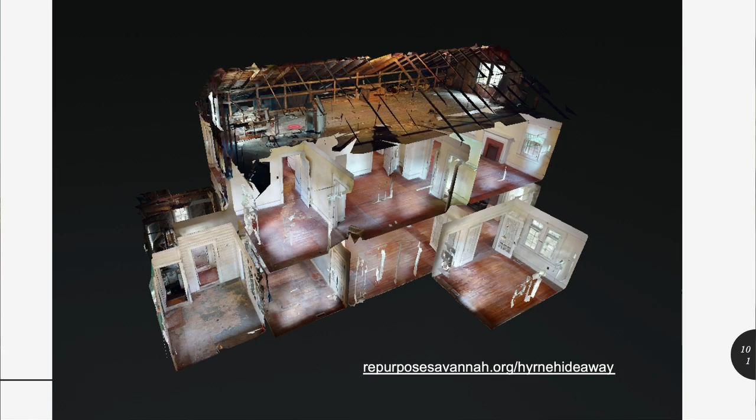You'll be more familiar with this in terms of real estate. Folks in real estate are using this a lot now so that you can take tours of homes without having to go to them physically in person. Wonderful tool for research and for documentation of our historic buildings.

But for me, I'm a junkie, as was said earlier. I'm a junkie about historic lumber and about historic building practices. I'm a nerd about traditional lumber milling. I'm a nerd about traditional craft.

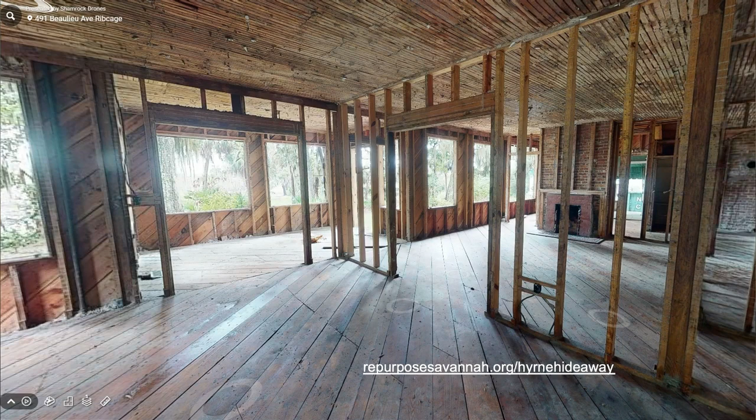So when we have gotten it scanned and then we get to work cleaning out the interior, we get it scanned again so that you can walk through the building with all of the finishes stripped off. And our students of preservation and our students of building can learn about how that building was built. You can interact with the materials. You can pinpoint where it is on that fluid timeline from timber frame to balloon frame to stick frame to modern construction. Every building is somewhere on that continuum, and I've never seen one that is clearly one or clearly the other. There are always these traces and overlaps.

So every time we lose a historic structure, we're losing a lot of data about the history of the built environment, and I just can't have it. So we need to capture it twice to make sure that we know as much as we can.

What's great also about this service is it's really economical for us. Not only do they produce these incredible walking tours of the structure, but they'll also produce facade drawing elevations. They'll produce floor plans, site maps for us. And these are robots that are doing this work, so it's highly affordable. It's wonderful for my clients. It doesn't add a lot to the cost of the removal of the building. And it's a way that we can contribute to the archive without having to break the bank.

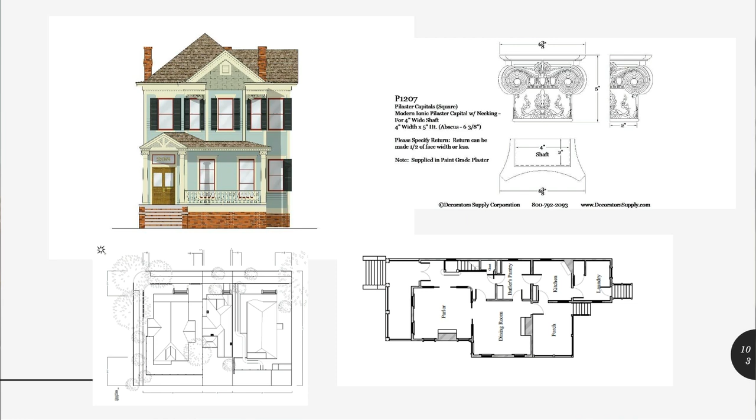Here's another example of some fine detail for one of our projects, or another one. This one actually we ended up being able to save because it had a terrible fire, and everybody said it was a total loss. You know me, you'll know I don't think there's any such thing. So we got in to clean it up, and once all of the worst of the damage was out, the bones looked pretty good. So we got an engineer in there to say, yep, good to go, and the building got restored.

Isn't that a happy story? That would not have happened if deconstruction didn't exist. That building would have just been demolished. So there it is, preservation folks. This is a benefit and this is a preservation practice.

So very quickly, I know we've covered a lot of this stuff before. What do trees do? Man, they eat carbon. It's their job, they're real good at it. And then we make houses out of that. And then as they age and they fall into decline, we start to identify them as a risk or a liability, tragically. Not all of them are restored, unfortunately. And sometimes folks need to absolve themselves, or municipalities need to absolve themselves of this risk and liability. So what do?

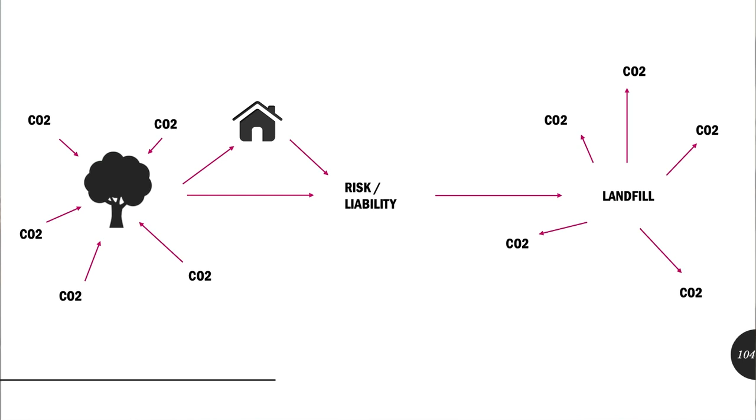We put them in the landfill. Out of sight, out of mind, problem solved, right? Where, of course, they spit all that carbon back out into the atmosphere, which contributes to the intensity of storms, which contributes to the risk and liability of our declining building stock.

However, this can be modified. It's a gentle tweak. What if when trees ate carbon and we made buildings out of them, and they started to fall into decline, we recognize that these are now assets for our community. And what do we do with assets? We certainly don't put them in the landfill, right? We steward them and take excellent care of them and bring them to bear to generate more for our community. We're going to invest in the future of these assets.

So we're going to deconstruct this for materials. And instead of spitting out carbon and methane and all kinds of nastiness, it's going to create other things. It's going to create jobs. It's going to create a product with an economic value. And it's going to create meaning in our community that's going to circulate over and over again.

This is my favorite part. I like the squishy stuff. And I can tell you countless stories. Please come visit me in my lumber yard where I will bend your ear on the fascinating history of every stick of lumber in our large facility.

These materials, most importantly, can go back into the repair of our precious building stock and help keep more structures from being lost to decline. Historic building materials are, without a doubt, the best thing to use to repair your historic building. Anybody who works in old buildings will tell you such. So let's save it so we can use it to save more buildings standing and lose fewer of them to the landfill.

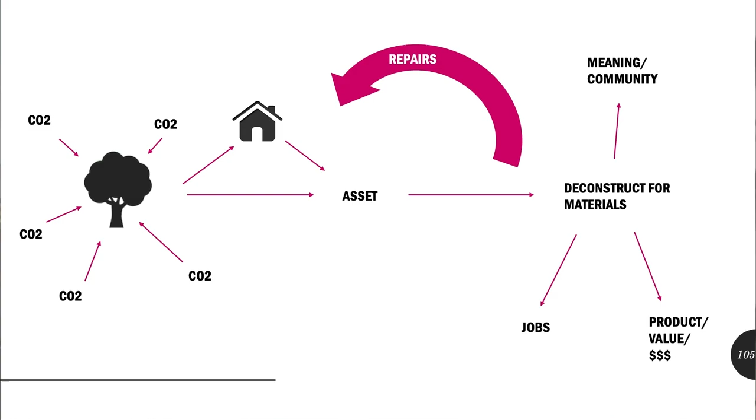Guess what? This also has a major benefit for us in terms of resilience. You guys are probably a lot more familiar with that term here in Nantucket than a lot of people are. This is a place that has been focused on resilience for a long time, and that's really impressive and very cool.

But in Savannah, we experienced this in a really primary sense during the pandemic. There was a lumber crisis. I'm not sure how it affected you here. Was it bad? Yeah, man, it was bad in Georgia too. It was really bad. The crummy 2x4 from Home Depot that usually costs you $3 costs you $20, and nobody wants to buy a crummy 2x4 for $20.

We, on the other hand - I don't know how it was up here, but there was definitely a building and demolition boom that coincided with COVID. So we were up to our ears in work. We had more work than we could handle. In fact, we still have more work than we can handle. I'm working really hard to cross-train other teams in Savannah to keep up with the demand for deconstruction services. So what that meant was that we had more supply than we'd ever seen.

And while the price of your crummy lumber went through the roof, our prices stayed exactly the same. So when you're looking at a crummy 2x4 versus something that is incredibly solid, historic, old growth timber that stood in perfect condition in a house for 150 years and is still in better condition than that new one you were just going to buy at Home Depot - and when that price is pretty similar, a lot of folks came over to our place and became converts of historic lumber.

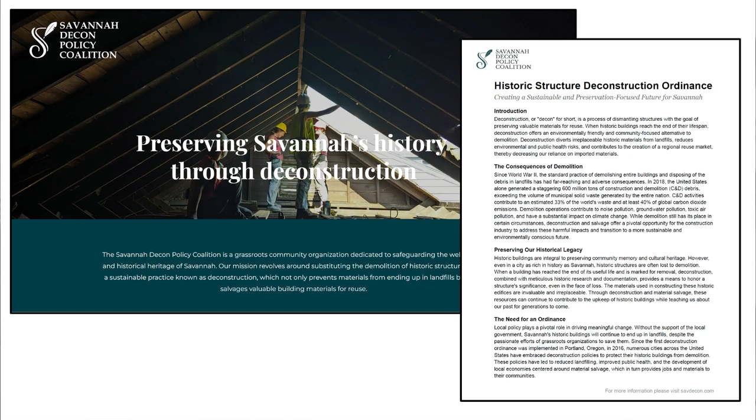Some of the successes we've had already with our local government: now in Savannah, if you want to apply for a demolition permit for a building of a certain age, regardless of whether it's in a protected district, you have to document that building and submit that documentation as a gift to the archive before you get your permit to remove the structure. This is amazing. This is a great leap forward.

It was spearheaded by our Office of Municipal Archives, who were inspired by the work that we do, and they thought, shoot, why can't we require this? And it turns out we can.

Something else we've had great success with is working with our local commissions to put conditional approval on the demolitions of any buildings within a historic district. What that means is, in the rare case that a historic building is approved for demolition, it's actually not approved for demolition—it's approved for removal on the condition that you hire a salvage company to deconstruct and reuse that material. That's been incredibly helpful.

It is, of course, subject to turnover in the commission, so we hope we're able to maintain our allies there and keep more of these beautiful properties out of the landfill. But until we're able to put in place something a lot stronger, like a city ordinance that could protect every historic building from going to the dump where it does not belong.

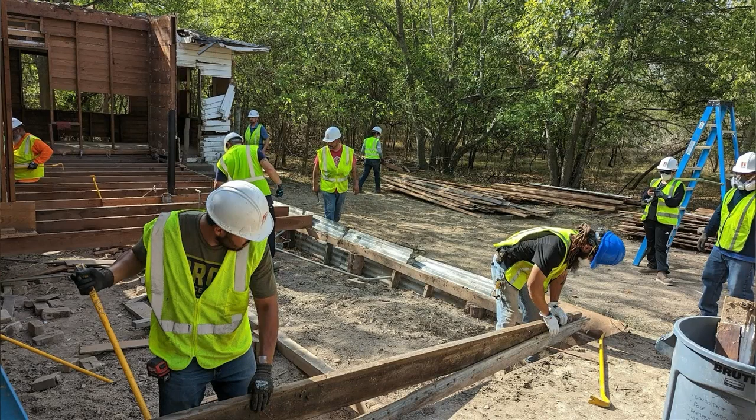This work is different than demolition. It is lovely, if I may say so myself. I'm a little obsessed with it. Once you've taken a building apart by hand, it's like the best puzzle you've ever done, and it's highly addictive. It's very clean work, very dignified work. It's a lot more like construction or archaeology than demolition. It couldn't be more different from demolition.

Our job sites are immaculate. They're as clean as a new build. That's because we've spent the first week cleaning the building, especially in cases when they're a little dirty, which sometimes they are. It's careful, it's respectful. We like to think about this as a way to pay homage and honor the building even in its decline. We can often think about these buildings almost like organ donors, helping keep other buildings in excellent health into the future.

It's also deeply satisfying work. I find it very rewarding, my team finds it very rewarding. I wish I could hire all the people who are clamoring for jobs to come work with us. I get resumes in my inbox all the time, and I don't have the budget to hire them all. I feel like folks could really benefit.

People want to talk a lot about the labor crisis in the construction industry, and I really just don't buy it. I think we have more of an access crisis. It's about throwing the doors to this wonderful industry open. Construction is a really rewarding industry to work in. You get really good jobs, good benefits hopefully, and a lot of folks would like to gain access to these careers.

We've got to work at breaking down the barriers that exist, particularly for women, half of the workforce, y'all. A lot of people want to tell me that women don't want to do this work. That's just not true. Women are, in fact, excellent at this work. My whole company is full of them, and we're very good at what we do.

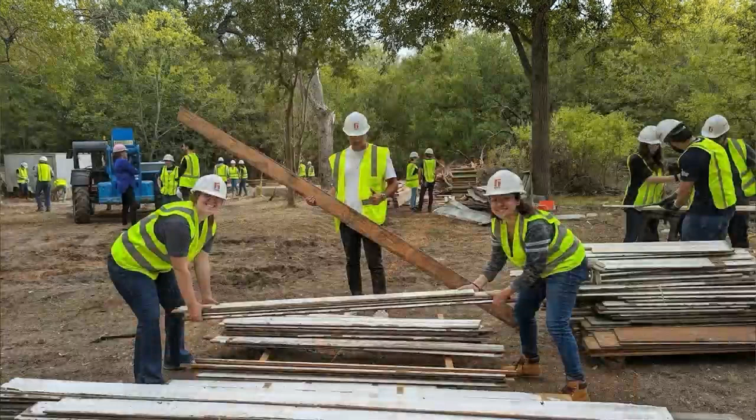This is also an opportunity to build community. We have school students out to our decon sites all the time. We're always working with local universities, working with the trade schools. In fact, I'm very proud to announce that we are hopefully in final stages of approval with the Department of Labor on the very first registered apprenticeship program for deconstruction of historic properties.

This is becoming recognized as a traditional historic trade and recognized as a skill. What this will mean is that anyone across the country who wants to run a deconstruction training program can follow this curriculum. It's approved by the Department of Labor. It puts you in line for funding for registered apprenticeship programs, which is a huge reason why we've done this in the first place, because that will help us a great deal and help grow the industry.

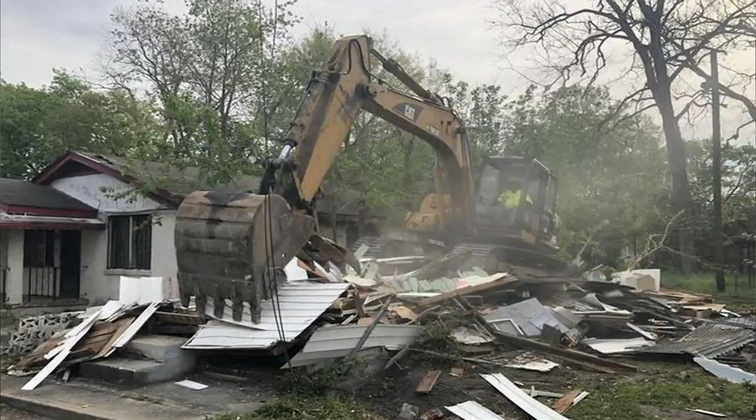It has been, without a doubt, the harder thing. Taking a building apart is challenging, but it is not rocket science. You need to be trained, you need to be safe, you need to learn your safety best practices. At the end of the day, the work to create a healthy, strong reuse market and a facility that can support the cycling of those materials in the community turns out to be way harder, but we have made incredible strides in that direction, and I'd love to help this community and many communities across the country avoid making so many of the mistakes that we have made and learned from over the years, and end up with a tight, tidy, beautiful facility.

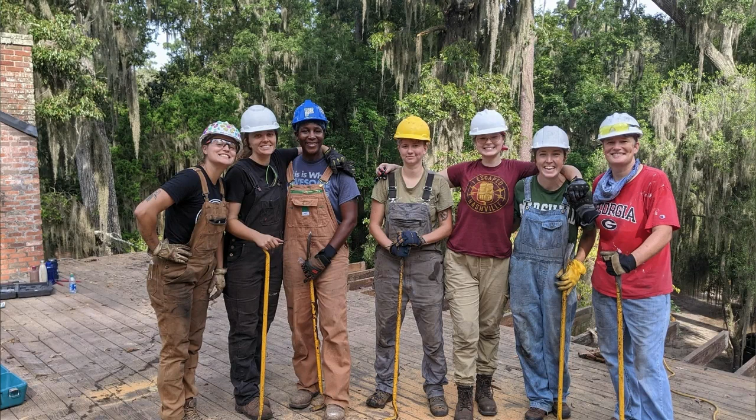Salvage yards don't always need to be junky. It can look like this. It can look like humans and not machines. It can look like training and opportunities. It can look like education. It can look like the marrying of sustainability, historic preservation, and construction. And I believe this is the way forward.

So I look forward to answering any of your questions as I watch this community move in the direction of deconstruction and reuse. Thank you so much.